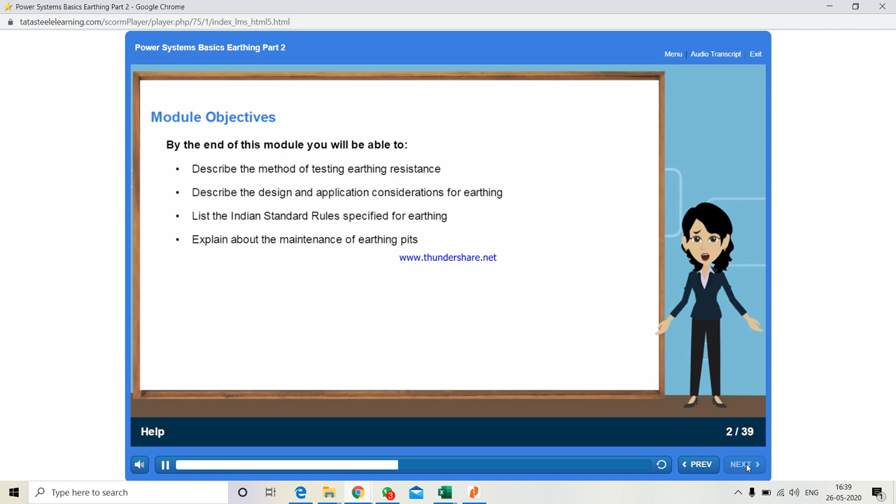Take a look at the objectives of this module. By the end of this module, you will be able to describe the method of testing earthing resistance, describe the design and application considerations for earthing, list the Indian standard rules specified for earthing, explain about the maintenance of earthing pits, list the dimensions required for deep bore earthing, discuss earthing design considerations in HT transmission line, list the specifications for tower earthing, identify the features of lightning arresters, and list the precautionary measures for earthing of lightning arresters. So, let us get started with the first topic.

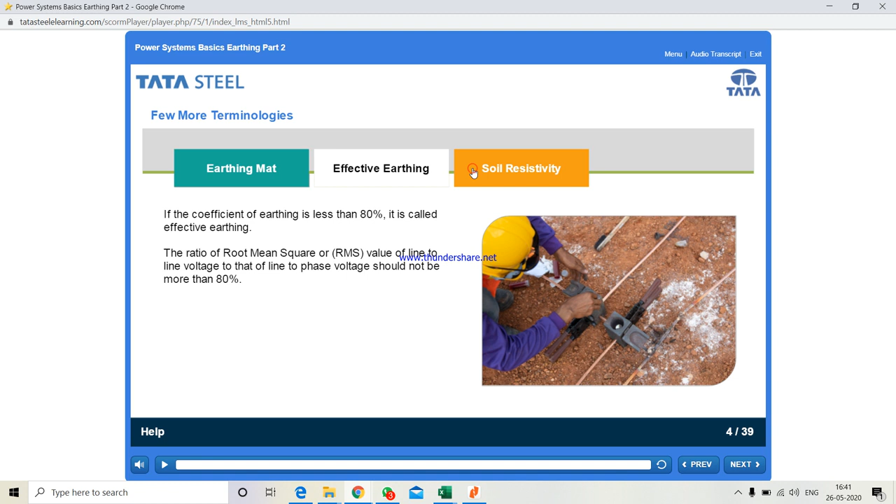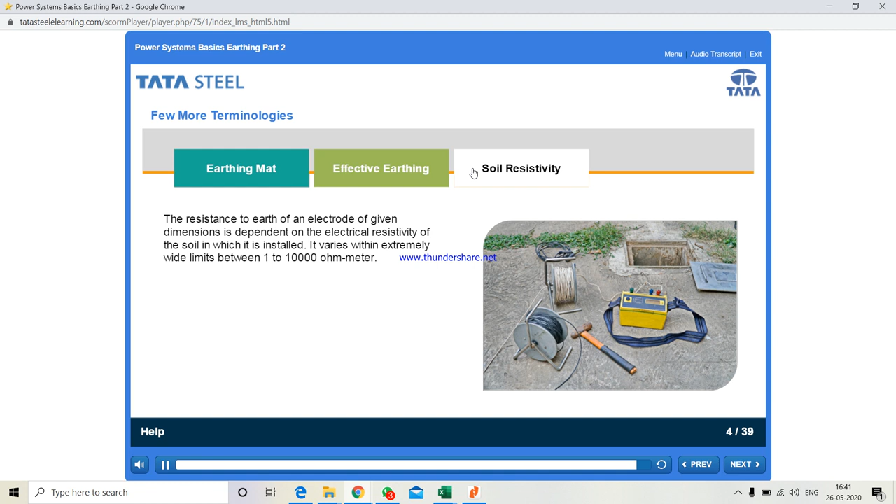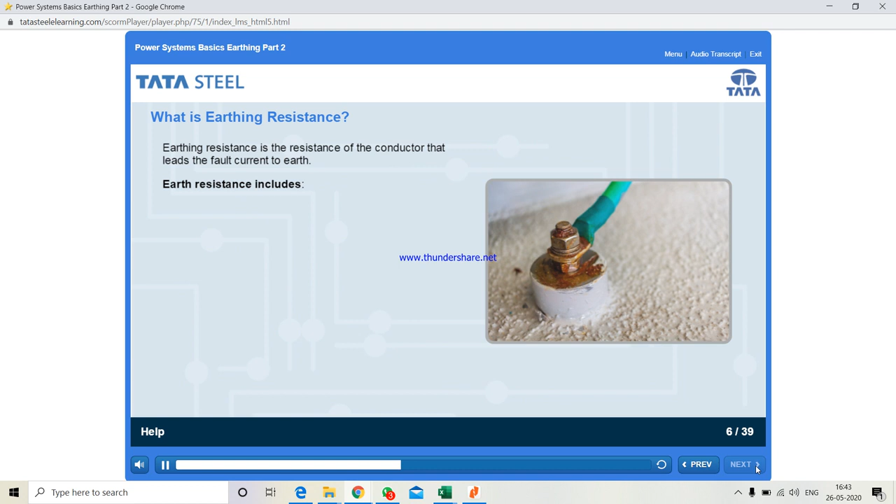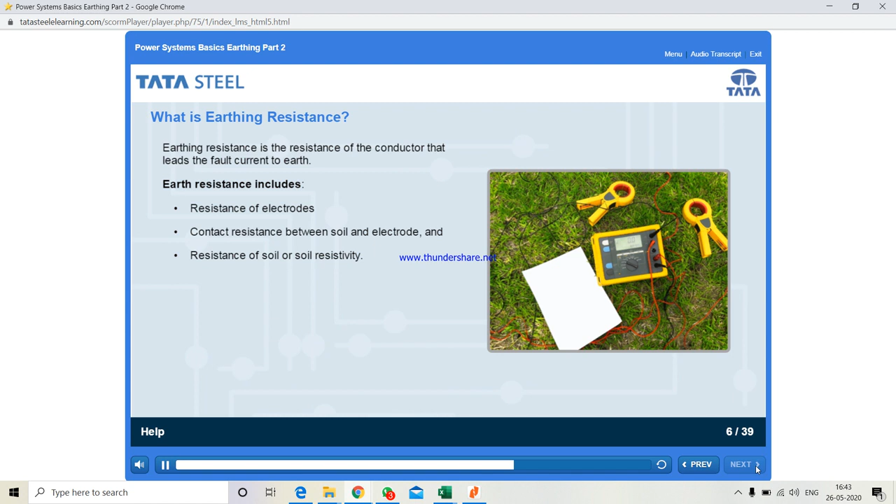Our next topic is about earthing resistance. We have learned about soil resistivity in the previous screen. Now let us see what earthing resistance is all about. As you know, earthing resistance is the resistance of the conductor that leads the fault current to earth. Earth resistance includes resistance of electrodes, contact resistance between soil and electrode, and resistance of soil, or soil resistivity. But how do we determine which is the right place for earthing? And what are the other things to be kept in mind before going for earthing? Let us discuss in the next topic.

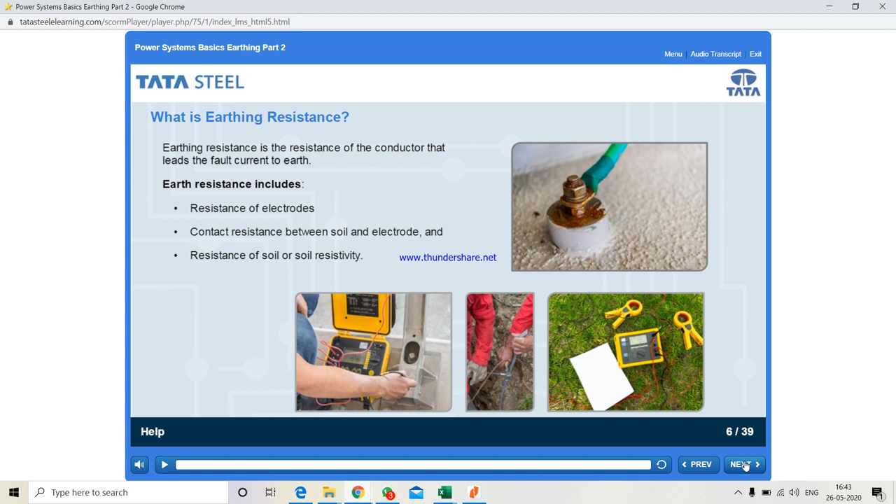This topic is going to be really interesting. We have discussed so many things about earthing, but how do we determine which place is fit, or what are the other technicalities to be considered before providing an earthing connection? Let us see. So once you decide that an earthing connection has to be given, these are the points that need to be considered: the selection of conductor, the selection of point where the conductor is to be earthed, the selection of size of earth wire, lead arrangement, protection and mode of connection to the earth electrodes, the selection of earth electrodes and the limitation of their resistances to the ground, fault current of the system, and location of earthing station.

Let us now look at a few more key points to consider when going for an earthing connection. They are selecting a suitable site, checking the extent of moisture therein, and checking the presence of suitable salts. Click on each image to learn more. A site shall be so chosen that it is not naturally well drained, and water should not be flowing over it. If an imported fill exercise has been carried out, in these cases, deeper driving of the electrodes may be necessary to reach suitable layers.

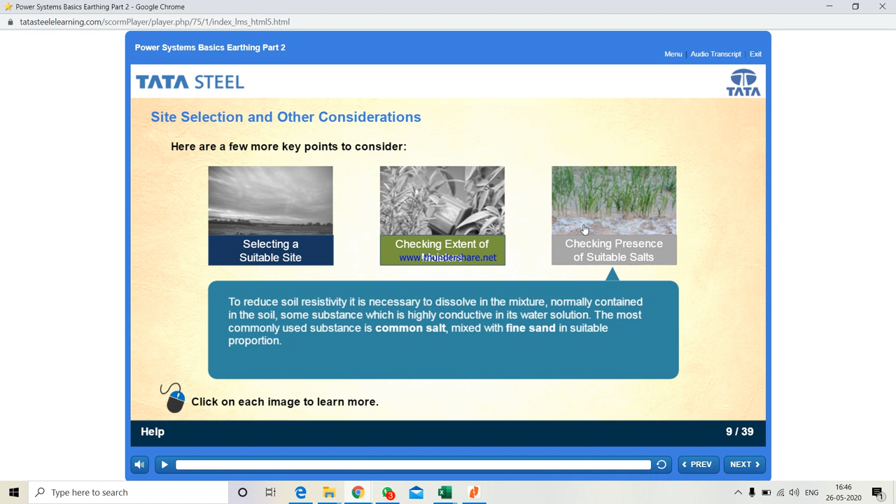To reduce soil resistivity, it is necessary to dissolve in the moisture normally contained in the soil some substance which is highly conductive in its water solution. The most commonly used substance is common salt, mixed with fine sand in suitable proportion.

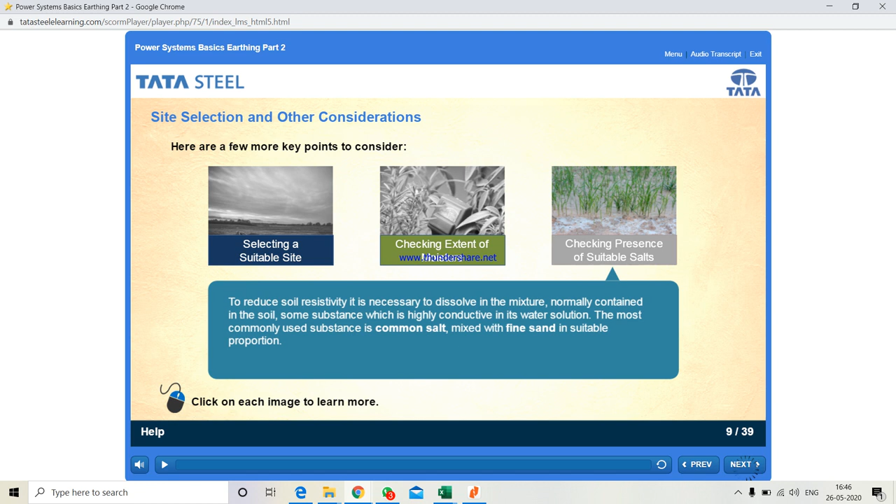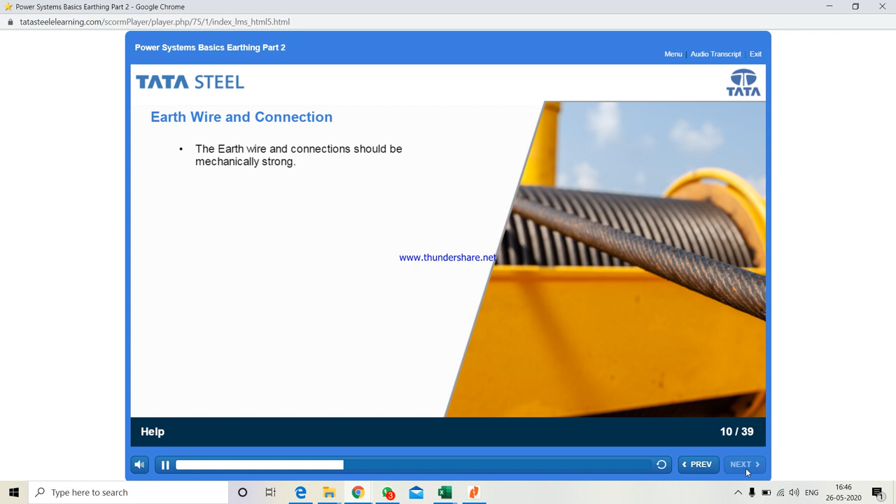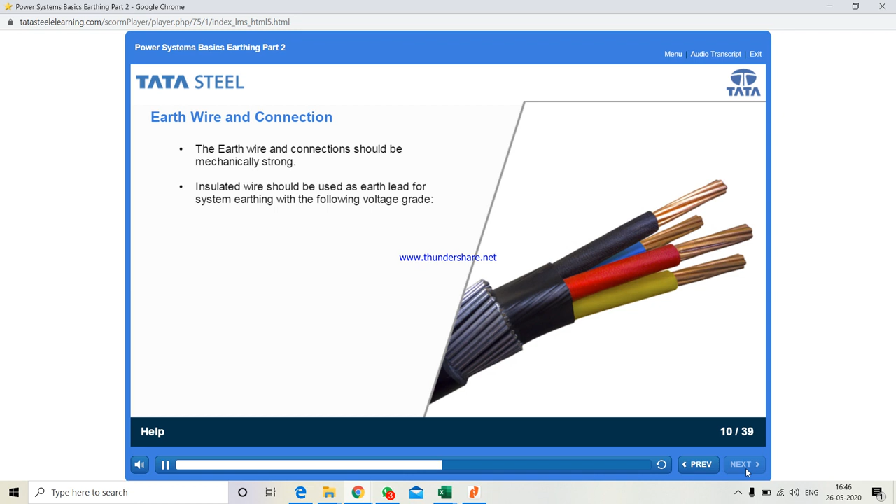Now something about earthing connections. There are some specifications for the earthing wire and connections as well. Firstly, the earth wire and connections should be mechanically strong. Next, you all know that electrical equipment are connected to earth using two types of conductors: naked wires and insulated wires. For earthing, insulated wires should be used as earth lead for system earthing, and their voltage rating is determined by the earthing type. If it is solid earth, then the insulation should have a rating of 1100 volts. If it is resistance earthing, then the insulation should have a rating of one-third of the system voltage. Let us move on to learn a little more about earth wire and connection.

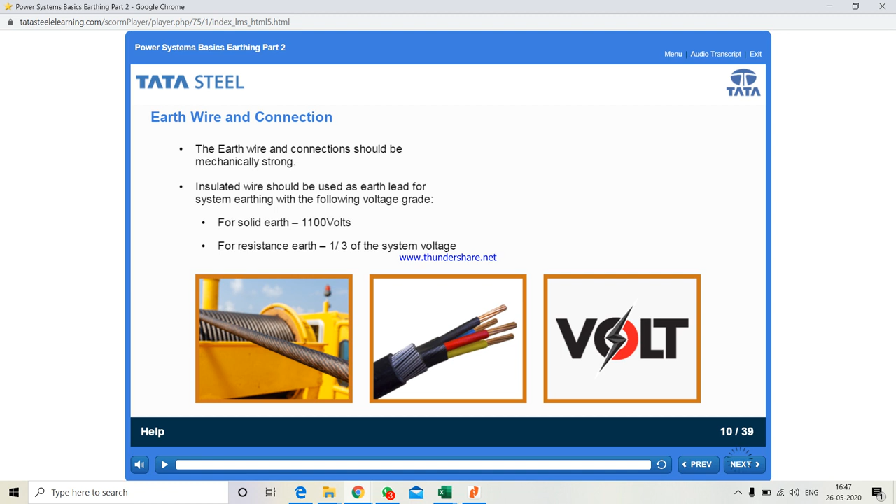Let us now see what kind of connections are used for different types of earthing. Click on each tab to learn more.

For equipment earthing, galvanized steel flat bar or mild steel rod shall be used as earth lead and painted with green and yellow as specified by IS 3043. Flat shall be connected with nut and bolts, and welded connection for rod.

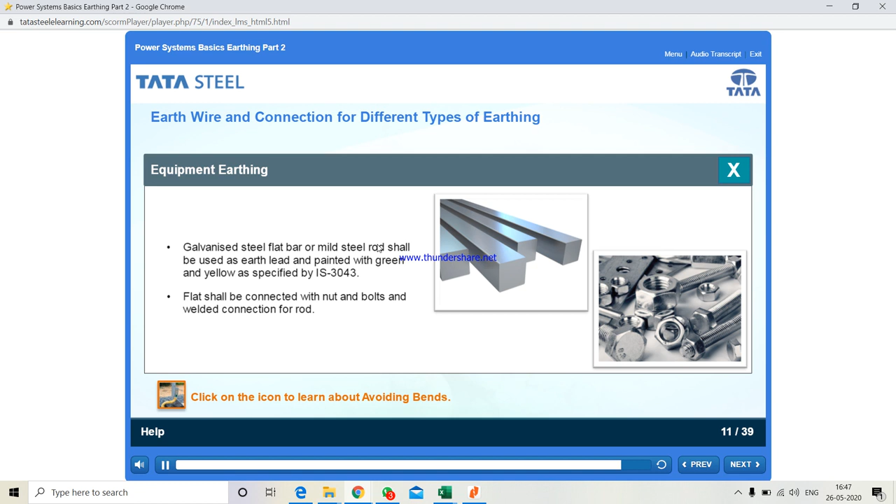In case of system earthing, earth lead shall be mechanically protected by providing a Hume pipe throughout its length when it starts from the transformer cell.

We have already discussed about earth electrode. Let us see if you remember it. Read the question, select the correct option and submit it.

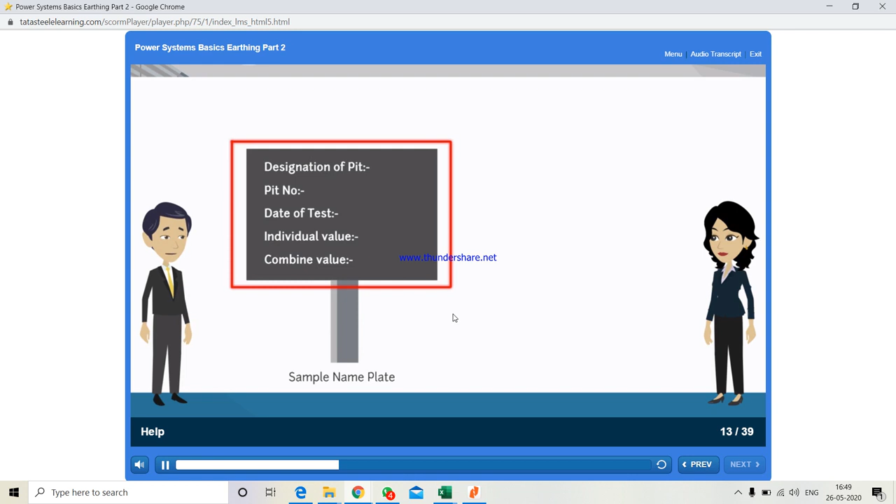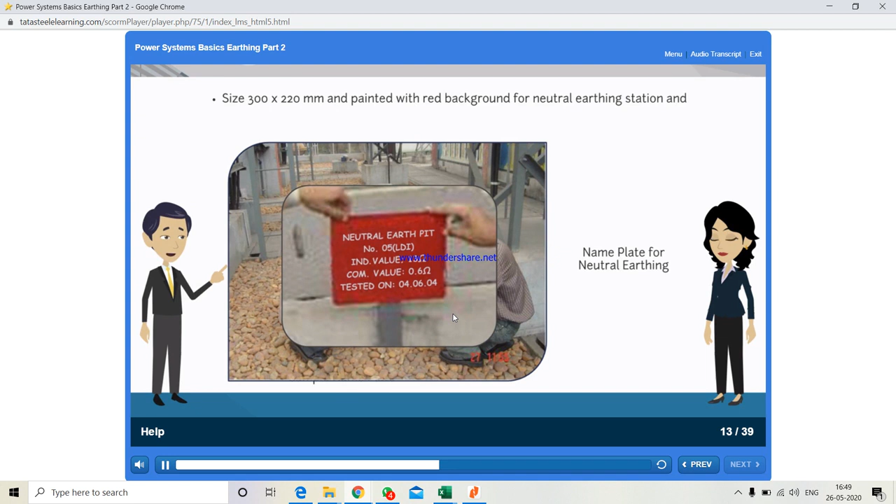So after construction, earthing pits are provided with identification plates. It looks like this, and these are the required fields. These identification plates have the following dimensions. For neutral earthing, the size should be 300 by 220 mm, and painted with red background for neutral earthing station and black background for equipment earthing.

Now I get it. That really helped. Thanks, Mayan. Anytime. Wow, this is getting interesting.

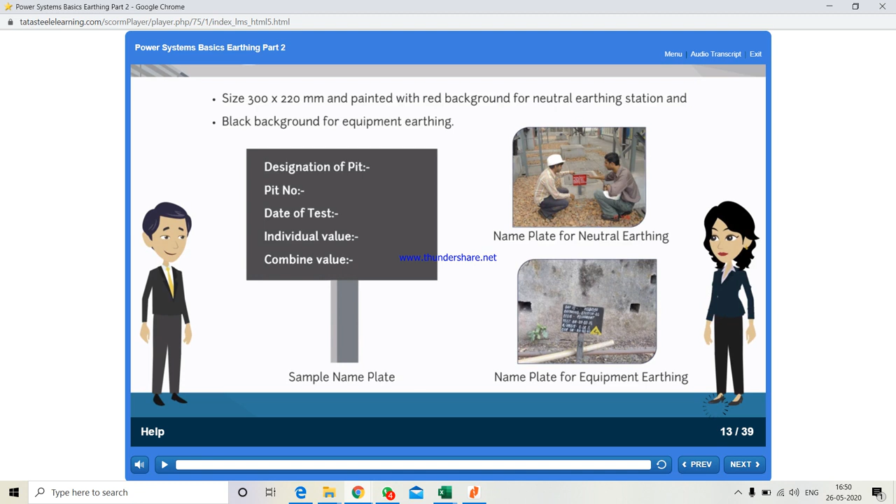We have discussed so many things about earthing. But have you ever thought who governs and specifies the rules or standards? Yes, all these earthing related specifications are done as per Indian standards. There are quite a few set standards that need to be followed regarding installation of earthing pit. Let us take a look at them.

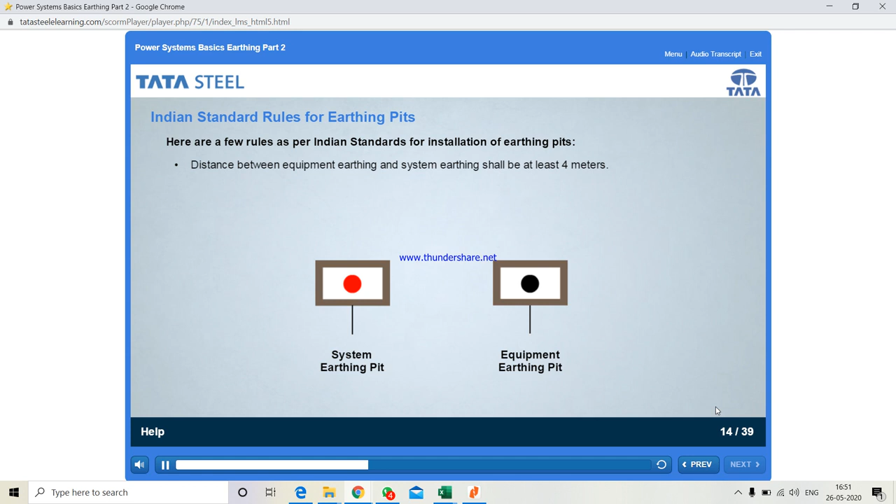Distance between equipment earthing pit and system earthing pit shall be at least 4 meters. As you can see here, this image shows two different earthing pits, red one being a system earthing pit and the black one an equipment earthing pit. If different pits are required in same location, then they should be installed 4 meters apart from each other. Similarly, the distance between two similar pits, for example, two equipment earthing pits or two system earthing pits, should be 2 meters.

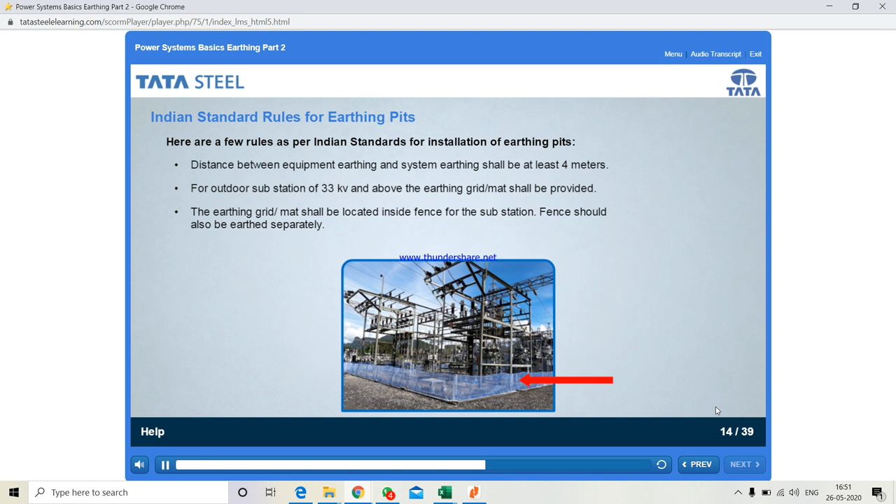For outdoor substation of 33 kV and above, the earthing grid or mat shall be provided. The earthing grid or mat shall be located inside the fence for the substation. Fence should also be earthed separately. Earthing station area shall be barricaded suitably by means of wire mesh fencing and it shall be earthed separately. The door and fencing should be earthed.

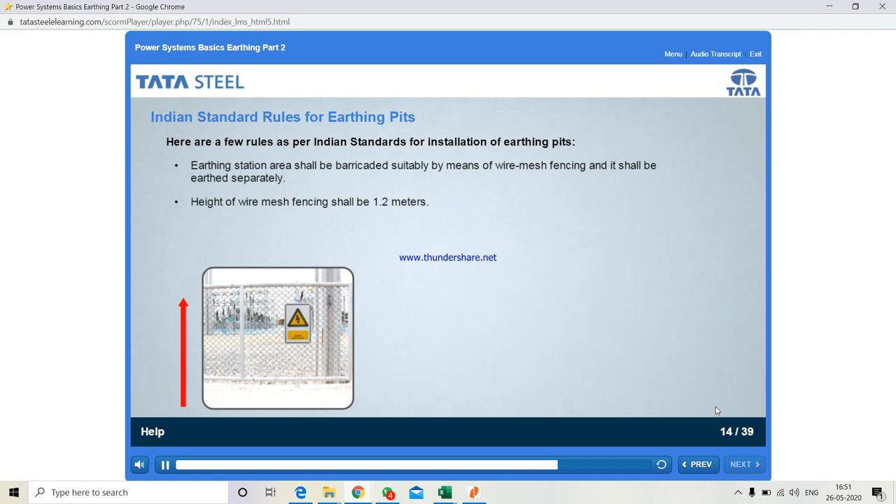Height of wire mesh fencing shall be 1.2 meters. In case barricading is not possible, a feeder pillar box of suitable size may be used to protect the earthing pit. Such unbarricaded earthing pit shall be at least 1.2 meters away from the road. So these are the rules for installing earthing pits.

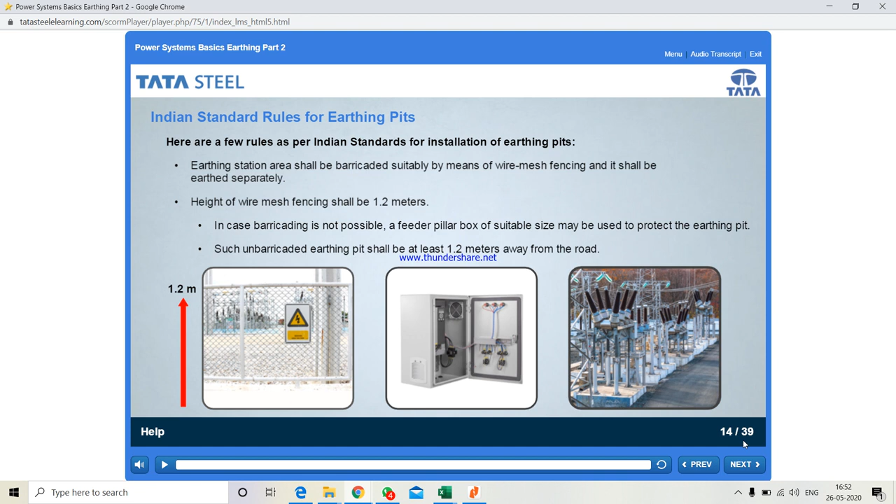Now we shall look at how system earth and equipment earth are interconnected. And obviously, we would need Mayan's expertise to understand this better. Let's welcome him once again. Hi Mayan, please help us understand the connection between system earth and equipment earth. I will be glad to explain.

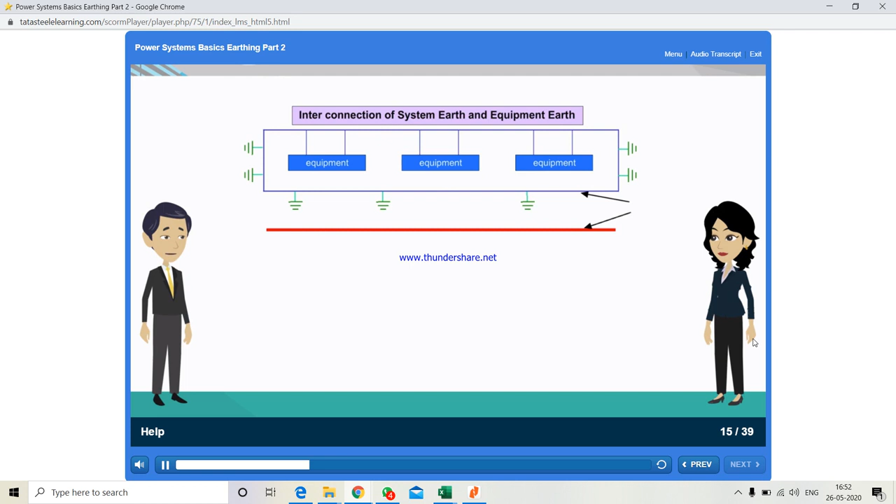We will understand this through an animation. Let us say this is an equipment pit wherein the non-current carrying parts are grounded. You can also see that there is a neutral bus bar and further there is a neutral pit. Here we can see that the live part is grounded.

Now suppose there is some maintenance work or testing to be carried out near the neutral earth pit, say pit B. Since it is connected with the live part, the testing or maintenance cannot be done online. This connection needs to be isolated first. However, isolating it will destabilize the power system.

Oh, then? Therefore, before putting off switch B to disconnect the power, we will put on switch A first and then put off switch B. Doing this will cause the neutral of the transformer to connect with the mass of earth through the equipment bus bar. This will allow the power to be disconnected to pit B without disturbing power to the installation, and work can be carried out. This is all about the connection between system earth and equipment earth.

That was indeed interesting. Thank you. Pleasure is all mine. Let us further learn about maintenance of earth pits.

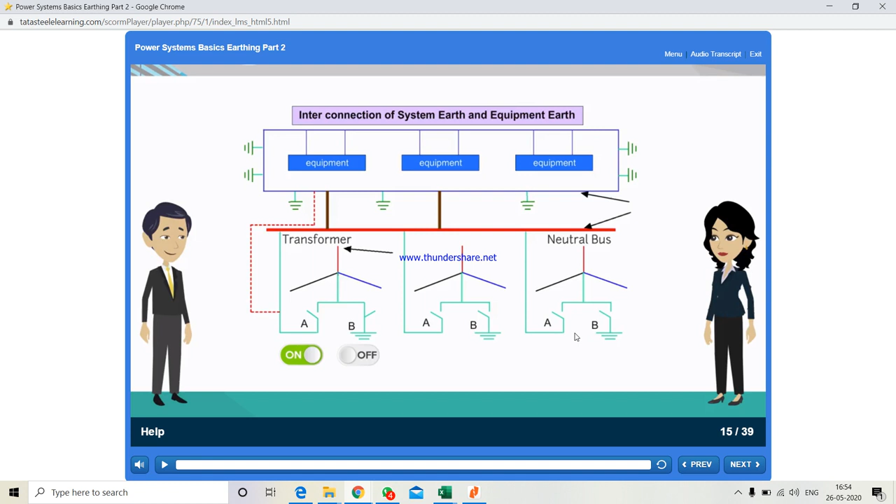In the process of maintenance of earth pits, the first step is commissioning. Let us look at what are the steps that need to be followed in commissioning. Before commissioning earthing pits, it shall be filled with a proportionate mixture of 50 kg common salt, 300 kg of water and 1500 kg of soil.

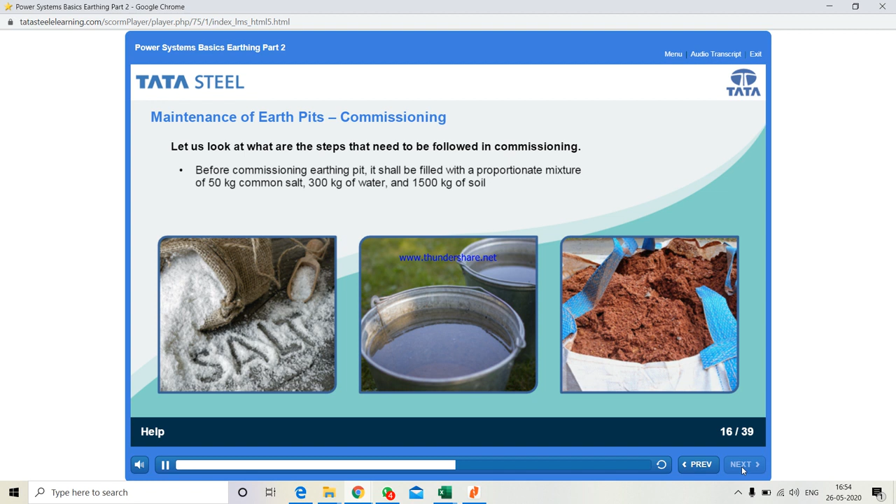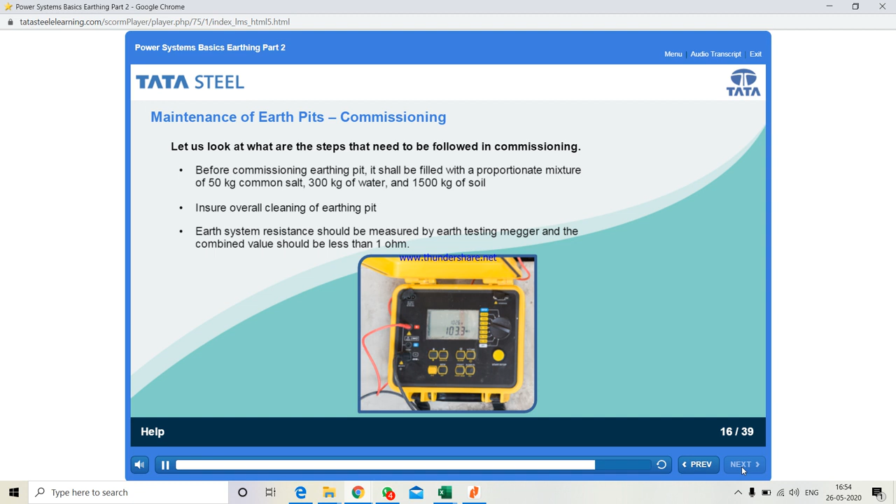Ensure overall cleaning of earthing pit and earth system resistance should be measured by earth testing megger, and the combined value should be less than 1 ohm. Let us move on to the next step, that is inspection.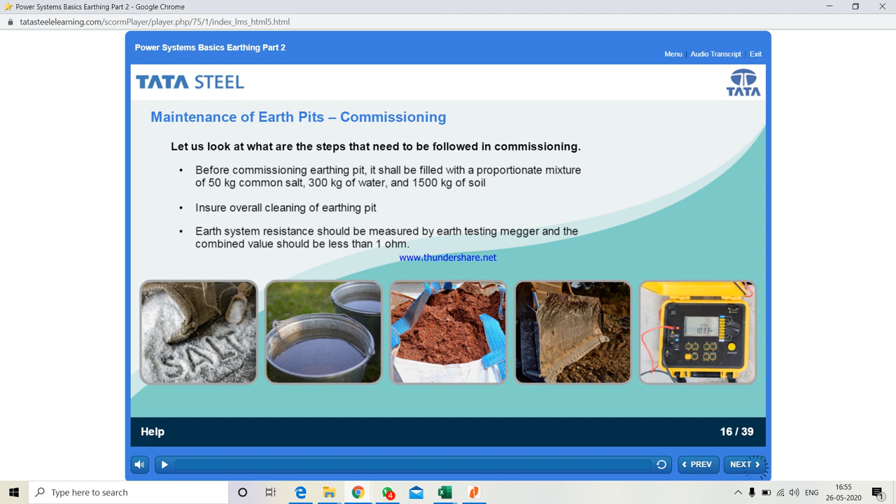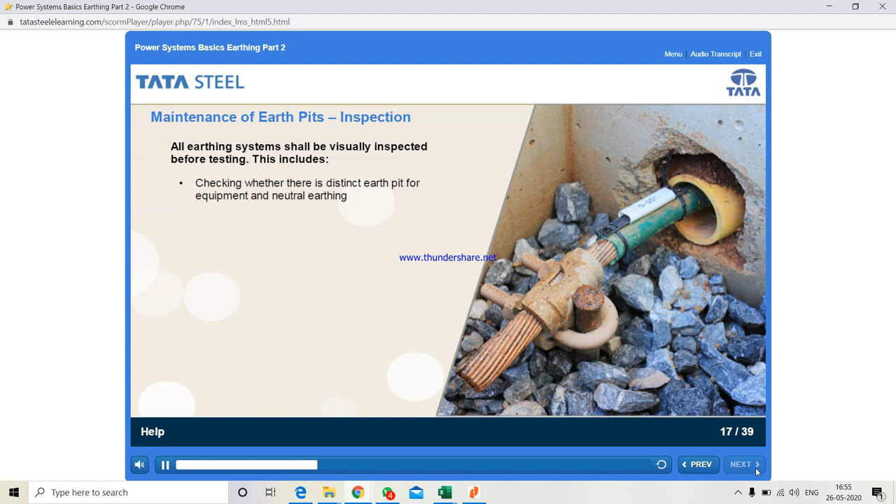In the inspection phase, all earthing systems shall be visually inspected before testing. This includes checking whether there is a distinct earth pit for equipment and neutral earthing, checking whether two distinct leads have been terminated at their respective pits, ensuring overall cleaning, ensuring condition of earthing resistor and link thereof, checking the condition of earthing pit and masonry work, checking electrode connection and their rigidity, and the condition of earth electrodes above ground level.

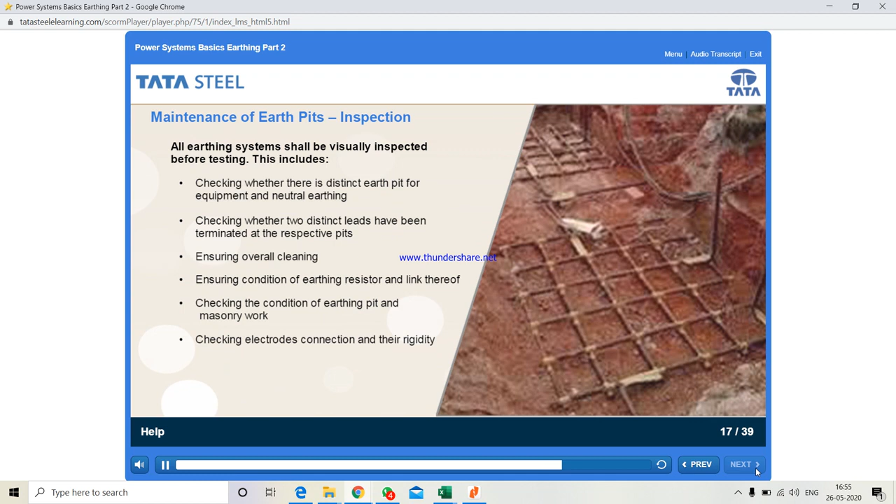Once voltage is checked across earth electrode and earthing lead is found to be below 5 volts, testing is done. The next step is to test the resistance of the earthing pit. It is advisable to test earth resistance during the dry season in order to get conservative results. Further, records shall be maintained for the initial earthing resistance and subsequent earthing resistance.

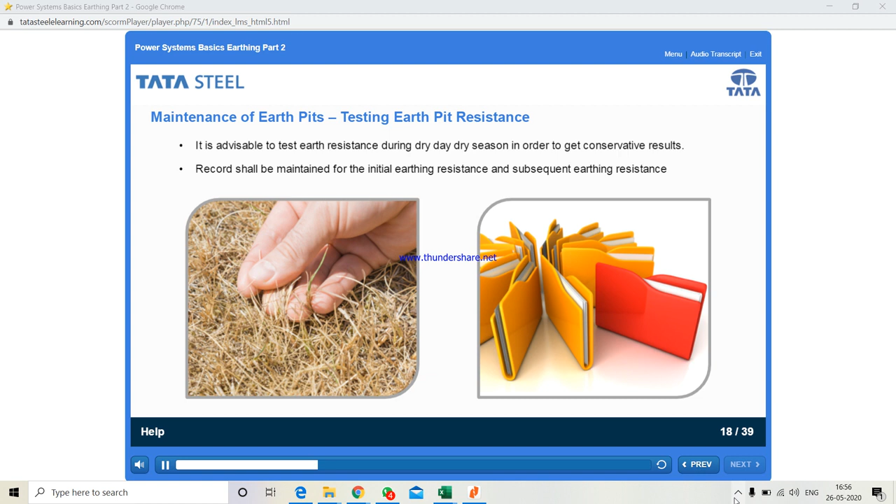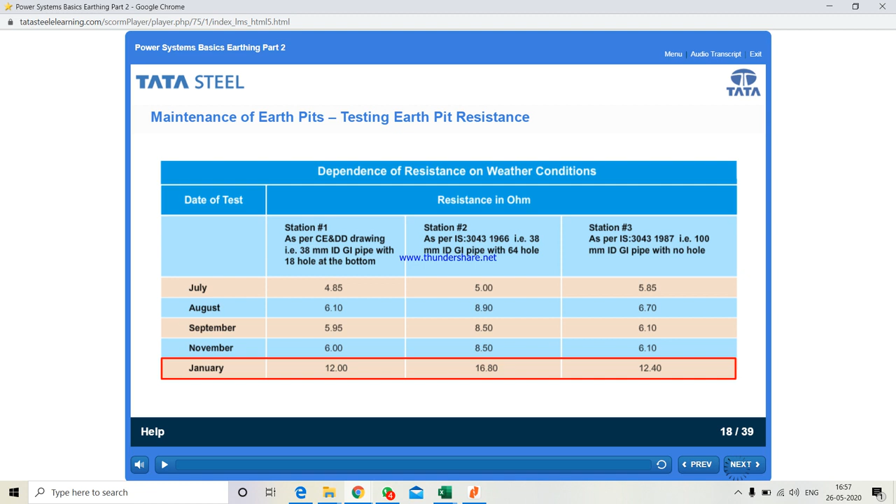So now we know that earth resistance varies from season to season. Let us look at a few more specifications in this context. Resistance should be measured during a dry day and dry season. For low and medium voltage, it should be done not less than once in 2 years. For high and extra high voltage, it should be done not less than once a year.

Identify the earthing station group to be tested. If the resistance value is found high, that is over 1 ohm, then only the individual station shall be tested. Test power in case of system earth. A caution tag shall be fixed at the isolating point. Voltage shall be checked and this shall be within 5 volts.

Only insulated lead should be used. The lead should be as short as possible. Current electrode shall be placed at least 30 meters away from the earthing station, and the potential electrode midway between them. Auxiliary electrode, usually consisting of a 12.5 mm diameter mild steel rod, shall be driven into the ground up to a depth of 1 meter.

The value of resistance to earth for each group of connected earthing pits shall not be more than 1 ohm for all ranges of voltages. Record of such test should be maintained for future reference. The old value written on the nameplate should be replaced by the new one.

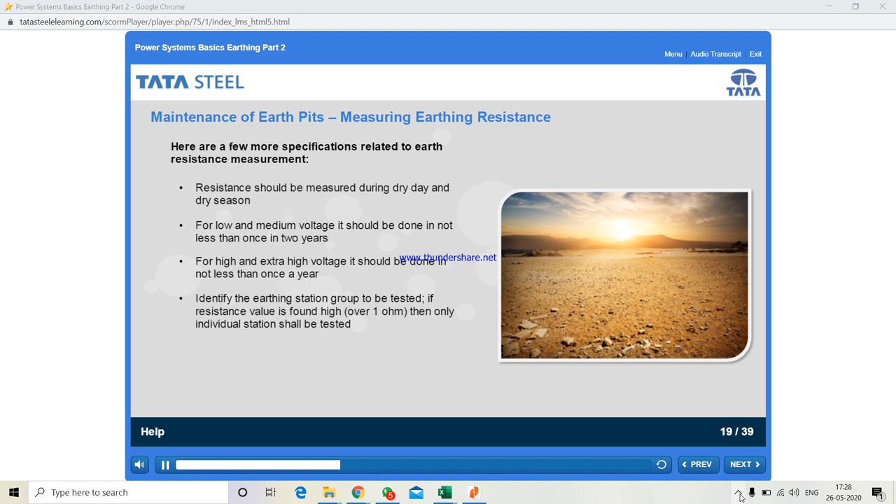Identify the earthing station groups to be tested. If resistance values are found high, that is over 1 ohm, then only the individual station shall be tested. Test power in case of system earth. Caution tag shall be fixed at the isolating point. Voltage shall be checked and this shall be within 5 volts.

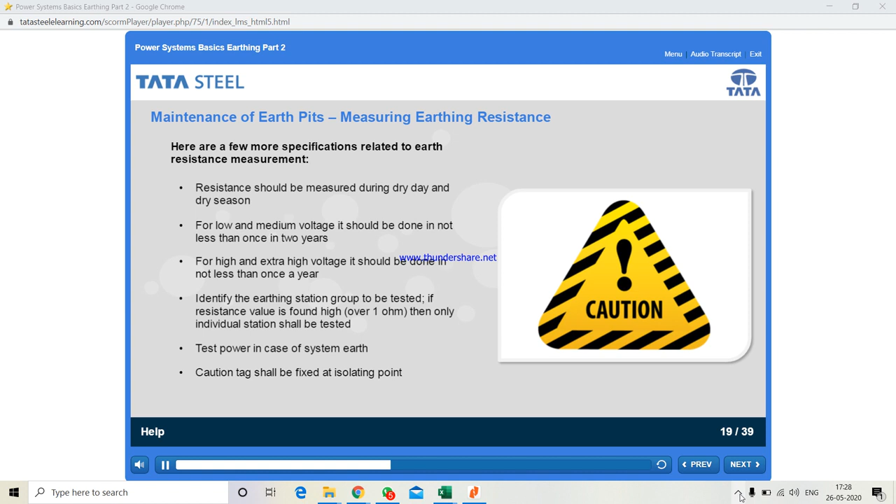Only insulated lead should be used. The lead should be as short as possible. Current electrode shall be placed at least 30 meters away from the earthing station and potential electrode midway between them. Auxiliary electrode, usually consisting of a 12.5 mm diameter mild steel rod, shall be driven into the ground up to a depth of 1 meter.

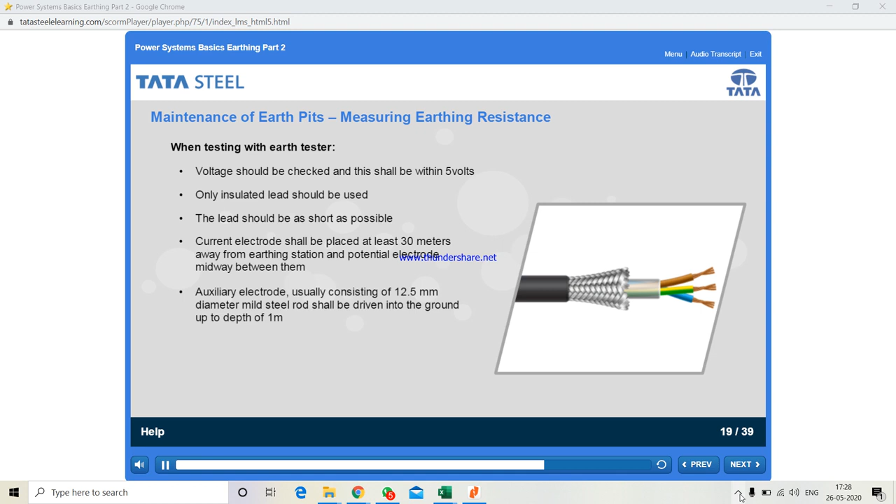The value of resistance to earth for each group of connected earthing pits shall not be more than 1 ohm for all range of voltages. Record of such tests should be maintained for future reference. The old value written on the nameplate should be replaced by the new one.

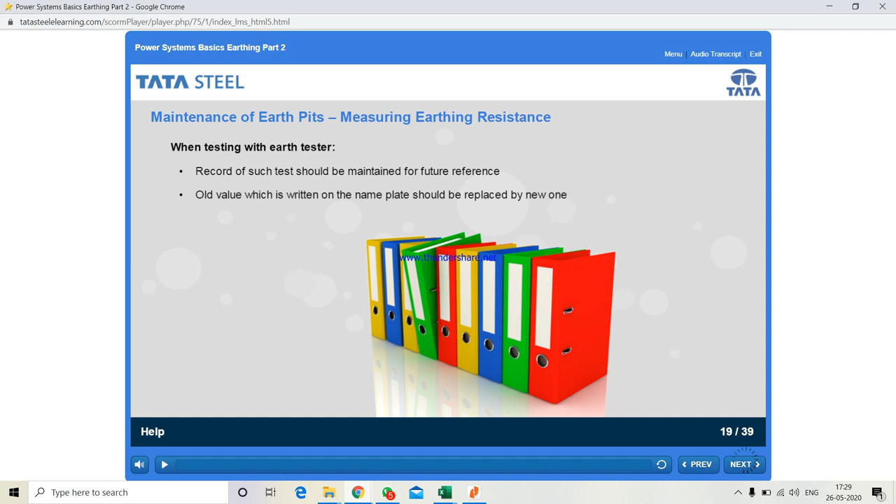This causes flow of current through the soil into the current coil of the earth testing megger. Now the voltage is measured across E and P terminals by the potential coil. The torque developed is proportional to V by I, which gives the value of earth or soil resistance, and the current is passing through the soil.

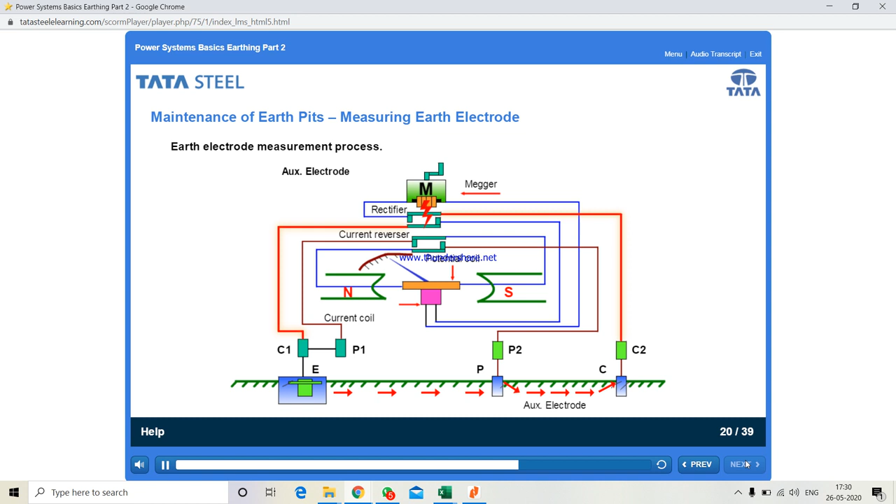Depending on the soil resistivity, the megger senses the amount of current passing through in terms of how much voltage is applied and how much current is going through the soil. So to measure the earth resistance, the voltage generated needs to be divided by the amount of current passing through. This division gives an idea about earth resistance. Therefore, the megger is crucial in finding out the earth electrode resistance measurement.

It is also referred to as earth testing megger. This is all about the earth resistance measurement process.

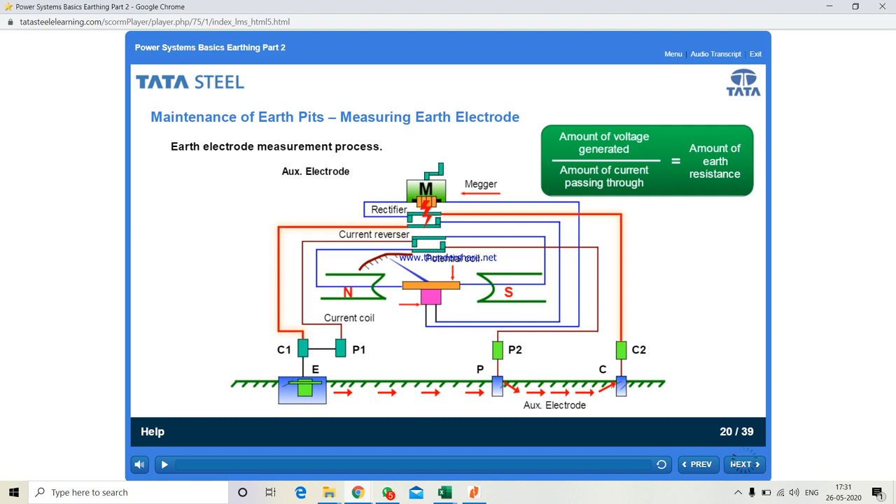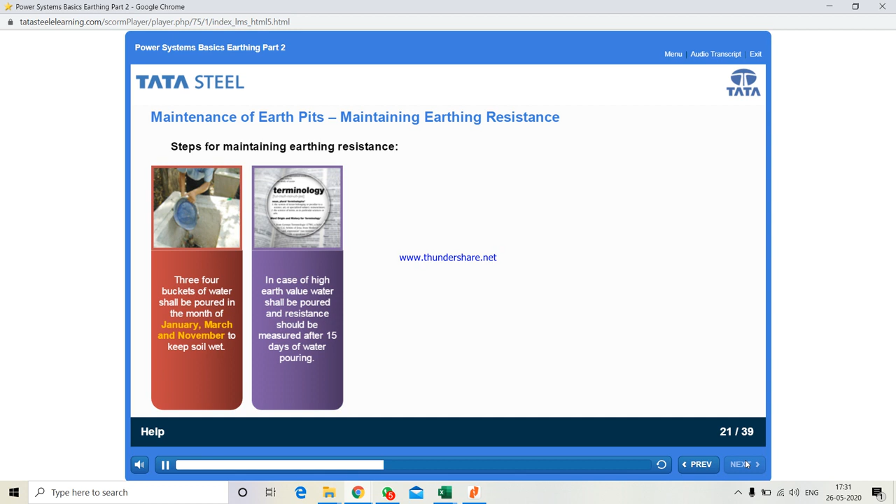We had learned earlier that testing should be carried out in the dry seasons only, right? Now let us understand what needs to be done to maintain earthing resistance. Firstly, 3-4 buckets of water shall be poured in the months of January, March and November to keep the soil wet. In case of high earth value, water shall be poured and resistance should be measured after 15 days of water pouring. If the earthing resistance is found consistently higher than the prescribed value, then rework should be done.

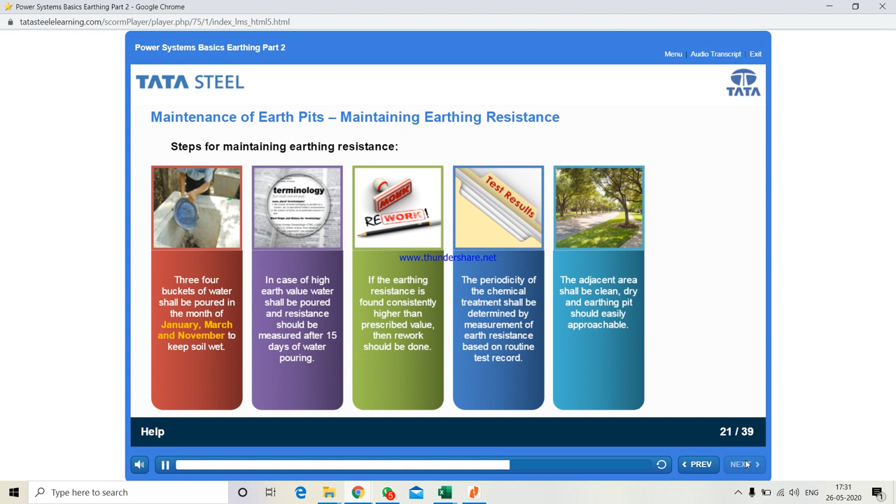The periodicity of chemical treatment shall be determined by measurement of earth resistance based on the routine test record. The adjacent area shall be clean, dry, and the earthing pit should be easily approachable. No material should be allowed to stack, dump, or accumulate, and debris shall not be deposited near or within the earthing station area. That was the end of this topic.

Time now for a quick review.

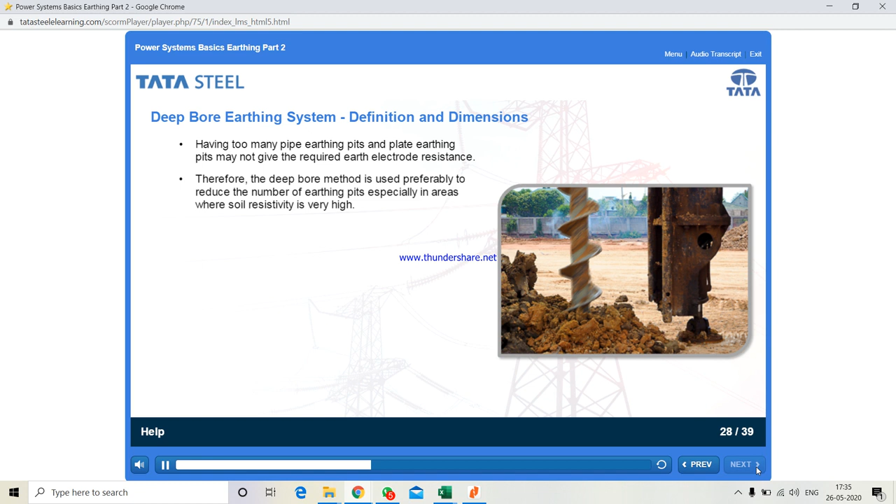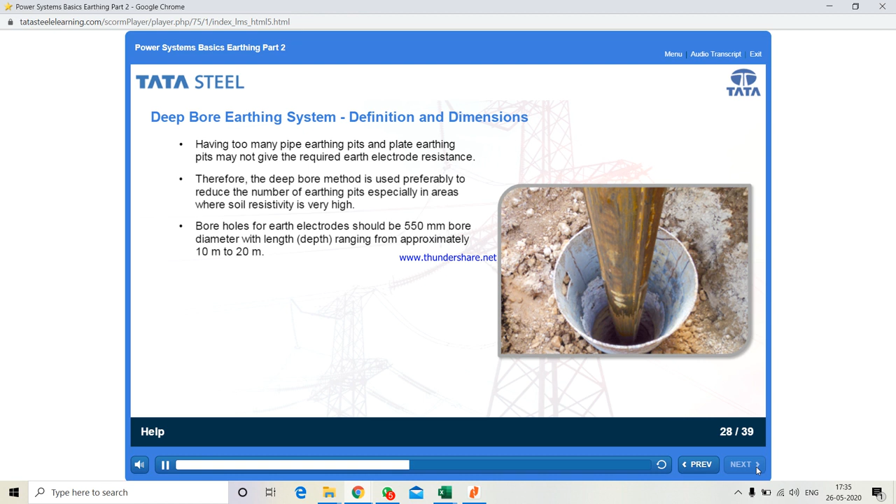Let us now look at the dimensions required for deep bore earthing. Bore holes for earth electrodes should be 550 mm in diameter with length or depth ranging from approximately 10 to 20 meters. They are generally made by driving a bailer, as indicated in the drawings for construction of bore holes along the boundary of the plant.

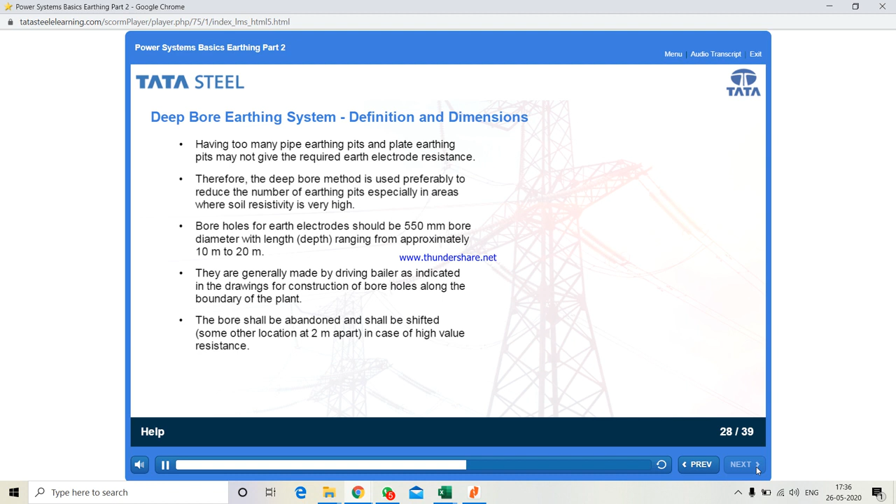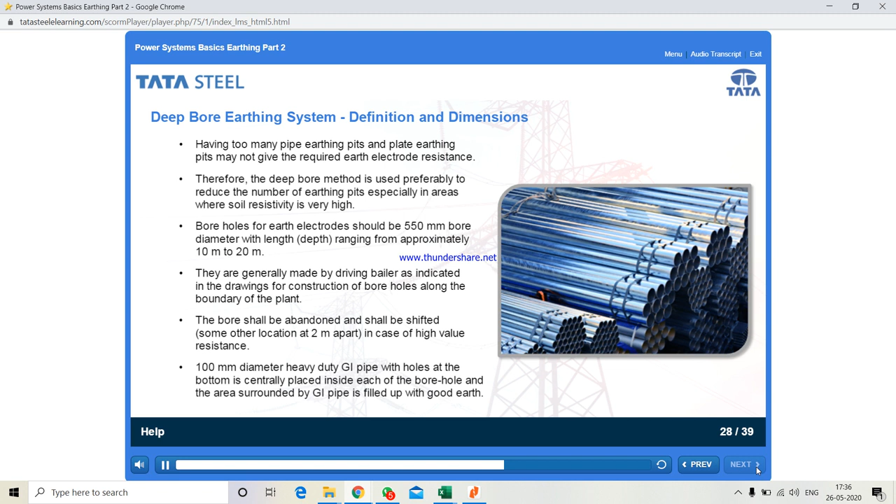The bore shall be abandoned and shifted to some other location, 2 meters apart, in case of high value resistance. A 100 mm diameter heavy duty GI pipe with holes at the bottom is centrally placed inside each bore hole, and the area surrounded by the GI pipe is filled up with good earth.

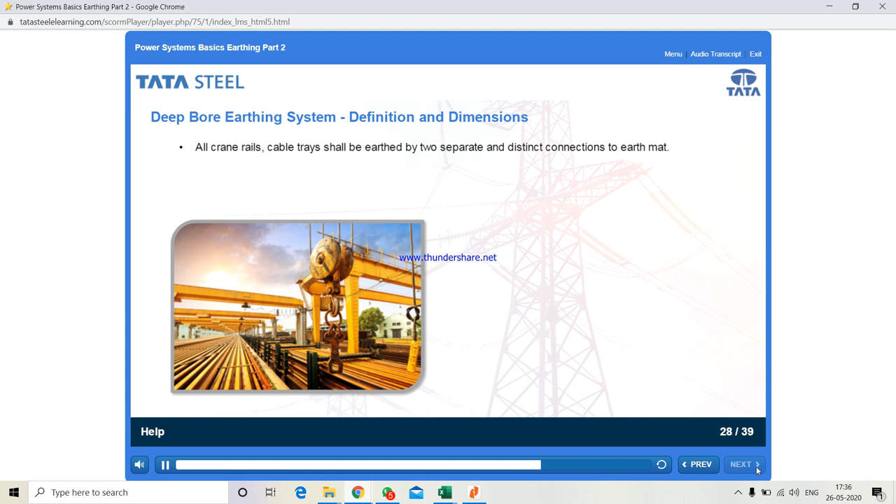All crane rails and cable trays shall be earthed by two separate and distinct connections to the earth mat. Alternate building columns shall be connected to earth mats. Earth mats or grids shall be formed by properly routing 50 by 6 mm GI flats, welded and secured duly along the structure, tunnel, building walls, etc.

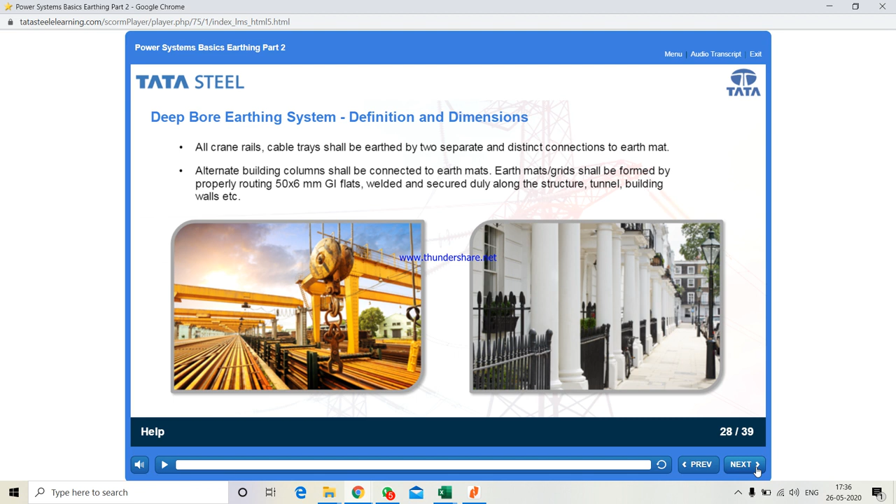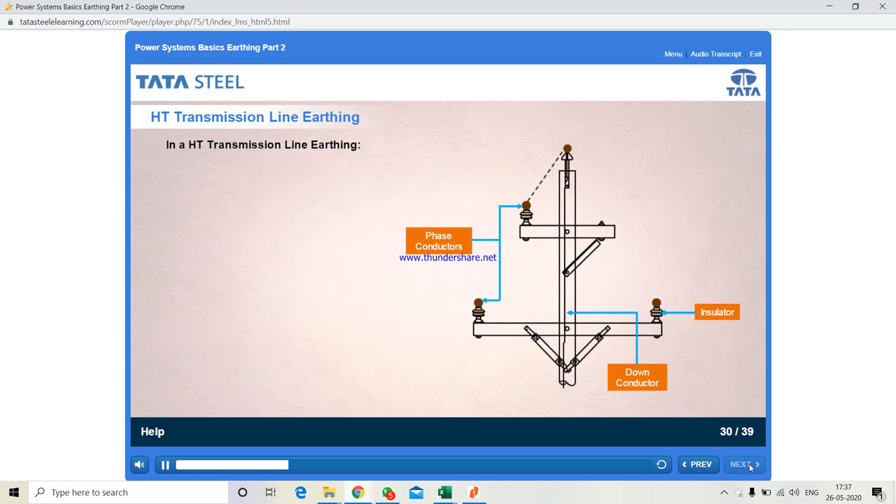In this topic we shall discuss earthing for high tension transmission lines. As you can see in the figure, the earth conductor is placed on top of the structural tower to provide a shield angle over the power conductors to protect against lightning stroke. The recommended angle is 30 degrees with the vertical formation of the power conductor. This is also called the protection angle.

The shield angle is usually maintained at 25 degrees for the outer conductor and 45 degrees for the central one. Let us move on to learn about the specifications for tower earthing.